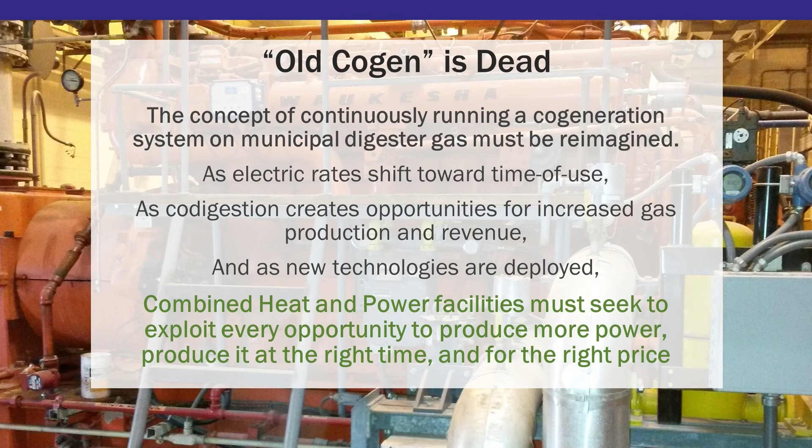And as new technologies are being deployed and coming to market, wastewater treatment plants with anaerobic digesters and combined heat and power facilities must seek to exploit every opportunity to produce more power, produce it at the right time and for the right price.

There are a few other drivers behind this. One is electric markets are changing again. And this is a statement specific to California, but we'll see this across the nation, which is that electric markets are deregulating. They're shifting toward customer choice. There are more renewables coming onto the market, and all of this is making for a very dynamic situation for the grid. And we'll talk more about that in the body of the presentation.

The last piece here is vehicle fuel. And there's the well-known saying, the best time to plant a tree was 20 years ago, the second best time is now. If you had put in a biogas to vehicle fuel system 5 years ago and had been running it these last 5 years, you'd be paid off and rich. So the second best time to have that facility would be right now, and specifically on-site vehicle fueling. And I'll show you the economics and the grant funding behind what's driving that statement as we get into it.

On the time of use front with electricity, I want to show what we call the duck curve in California. And the duck curve shows the amount of power required from other generation other than solar over a 24-hour period. So what you can see is the belly of that duck at 2020 is showing that traditional forms of power generation, whether that's nuclear or natural gas, we don't have coal here,

that drops off during the afternoon hours when solar is cranking. The problem is between 5 p.m. and say 9 p.m. when solar drops offline and there's a huge increased ramp up required of basically less renewable or non-renewable power generation sources. That's what's causing the emphasis on time of use, because the grid is less stable during that ramp up period. And our independent system operator here in California has to manage supply and demand very tightly over those hours.

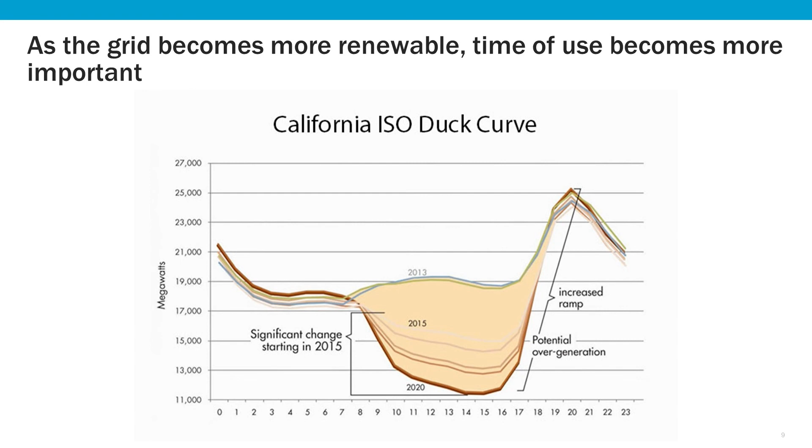That time of use dynamic is now reflected in the rate schedules that we're seeing in California, and that I think will spread across the country. The traditional peak power price, especially during summer, used to be noon to 6. That's when power rates were the highest, because that's when we had the highest power demand, running air conditioners, lights in offices, etc. Now, reflecting this grid instability as solar drops offline, the high price is now 5 to 8 p.m. or 6 to 9. It's later in the day.

It's a new dynamic, and the interesting part here is utilities that have solar and were counting on making money from 12 to 6 on peak power aren't going to make that anymore. Now the peak rates are when your solar is dropping offline. So you're less able to bank up the peak power credits with a solar power facility as you were 5 or 10 years ago. So an interesting shift there to keep in mind.

Vehicle fuel is driven by a major federal program. That's the Renewable Fuel Standard. And the credits you generate there are called RINs. There are different grades of RINs or categories based on, again, how your vehicle fuel was made. In California, we also have the Low Carbon Fuel Standard, and that's implemented by our Air Resources Board. And the goal there is to reduce the carbon intensity of our vehicle fuels in the state.

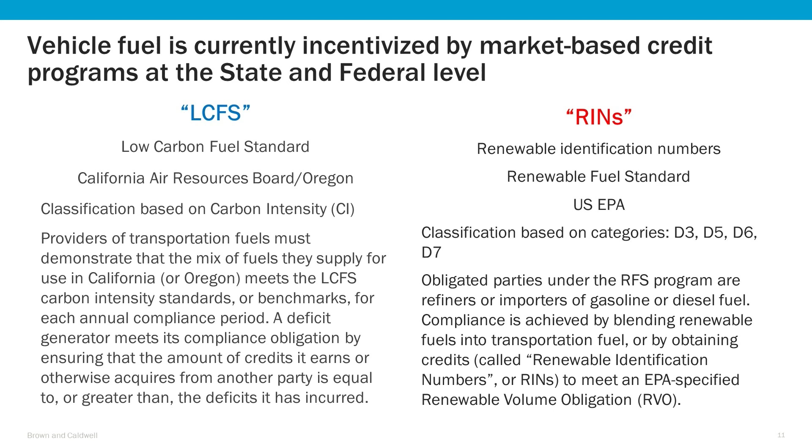You don't have to be in California to get LCFS credits. As long as you've got a pipeline connection into California, you can make biogas and inject it in Texas and still sell in California and derive these credits. But those are the two programs that are really pumping up vehicle fuel right now. Now, these RIN values are market driven based on supply and demand.

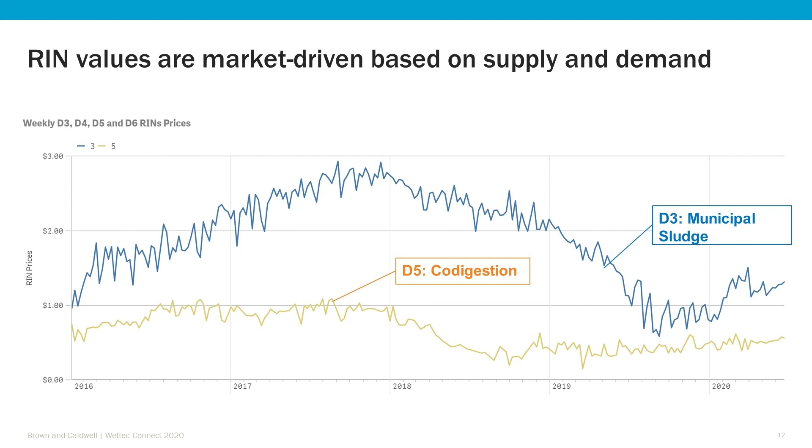Again, these are market driven. That's why you see the rise and fall of values. It's a supply and demand market. But this is what's incentivizing the vehicle fuel. And you've got to have a stomach for it. So, when agencies ask, what can we take to the bank? The answer is, 10 years from now, the crystal ball isn't super clear. We can model what it's worth right now and make some comparisons, and expect that they will come down over time, but it is ultimately up to the market and the regulators to decide.

If you inject into the pipeline, which is the next bar over, people ask, isn't that essentially natural gas? And the answer is yes. So what you get from pipeline injection is the commodity value of natural gas, which is about $3. Then you get the LCFS value, which converted into dollars per million BTU is about 7. And then that D3 RIN is 14.

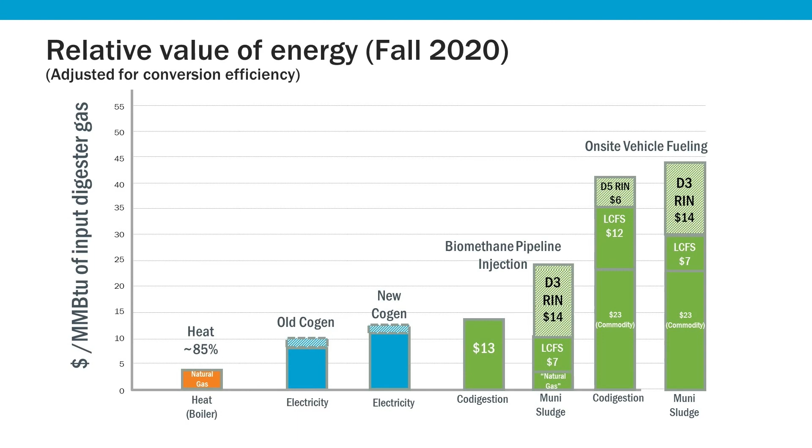So you can see that almost 80, maybe almost 90%, of the value you get from pipeline injection is based on environmental incentives, not the actual value of the energy content of the gas. And that factors heavily into a risk analysis if you're an agency looking at doing one of these projects.

The two bars on the right are on-site vehicle fueling. There, the value of the commodity is higher because you're offsetting the retail value of a vehicle fuel, such as diesel or gasoline. At the pump you're paying $2, $3 a gallon, so the commodity value we're showing for that gas is higher, assuming you're operating an on-site vehicle fueling facility and somebody's showing up and paying that $2 a gallon, which is a great value for your gas.

And then you're stacking the incentives on top of that. So going back to one of those bold statements, the best value you can get for digester gas or biogas is on-site vehicle fueling, and that's demonstrated by the bar on the right.

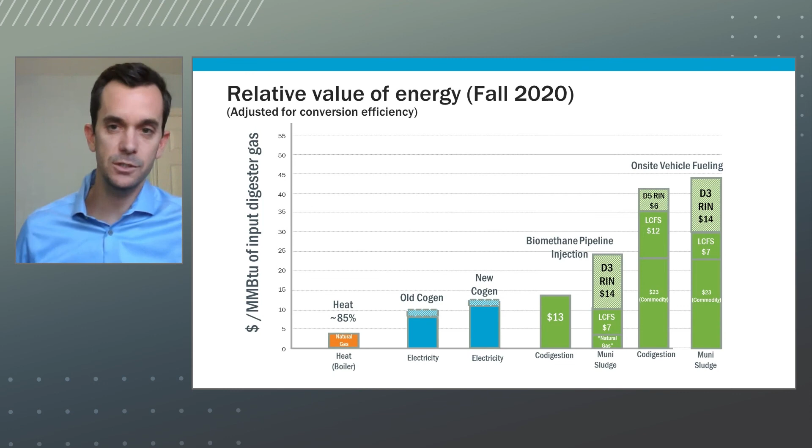All right, got some case studies here, and these are three different agencies that have looked at what to do with their biogas. The first one is the City of Santa Rosa, and I've coined this the continuous improvement example. Santa Rosa is in Northern California. They're a 15 MGD facility with 4 digesters.

Historically, they made about 200 SCFM, cubic feet per minute, of biogas. More recently, through high-strength waste co-digestion, they've increased their gas production by about double. Their old cogen system was 3 existing cogen engines that had actually been converted from engine-driven blowers into generators. They had natural gas blending with air dilution and no co-digestion, and that's a real familiar setup.

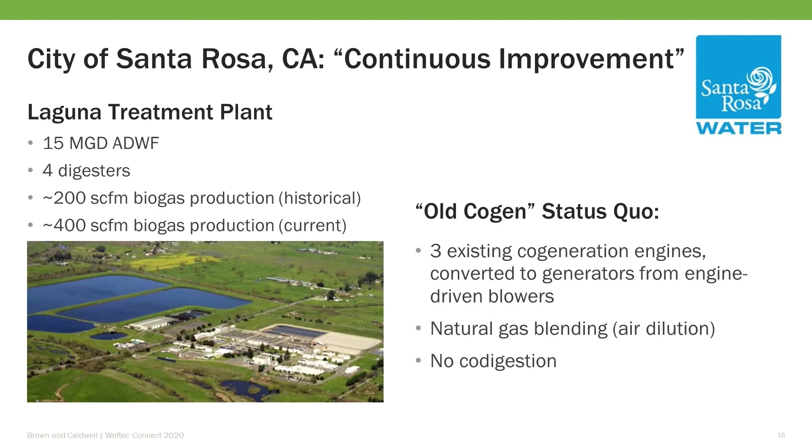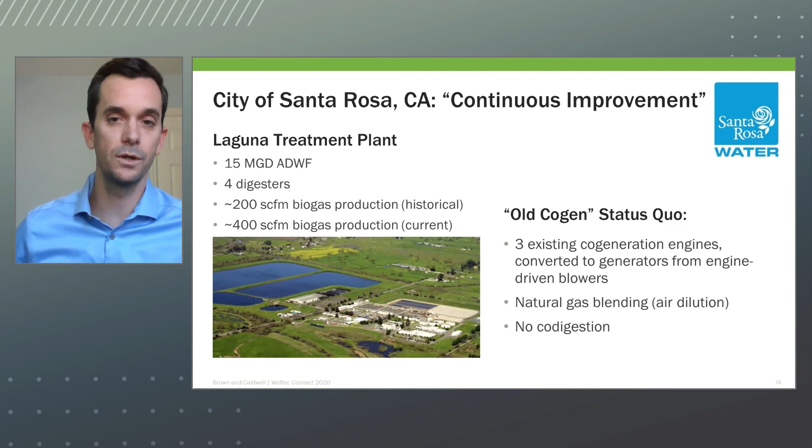There are a lot of treatment plants across the country that have basically old Waukesha engines that were a great system in the 80s and 90s, but are getting a little old. So we're going to show you on the next slide what Santa Rosa did to improve upon that situation.

Shown in the middle is their new cogen system. And when we go new on cogen, we call it combined heat and power, that's the new buzzword. So they put in 4, 1.1 megawatt cogen engines. These are highly efficient, lean burn engines. It's a great looking facility.

That project had enough gas to really operate one of them. The intent was to increase gas production through high-strength waste co-digestion, which is the picture shown on the top left. So that high-strength waste receiving facility came online, and sure enough we were able to double digester gas production there and operate 2 engines.

I almost glossed over the point here of the big check photo, which is a self-generation incentive program grant opportunity in California that we were able to successfully get for City of Santa Rosa and take $2.5 million off the sticker price.

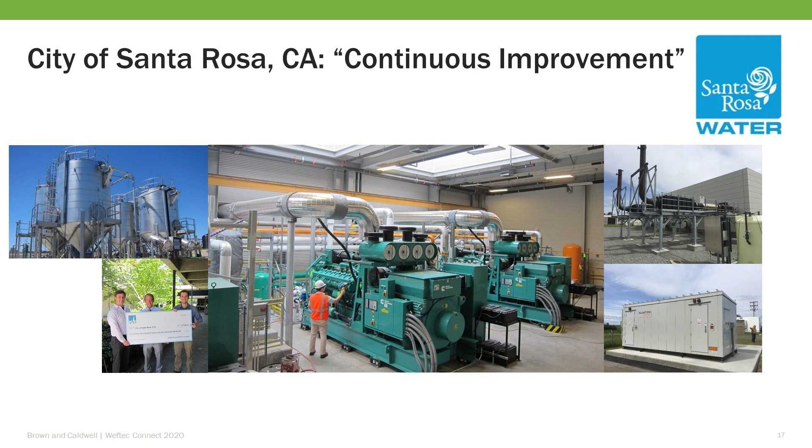With operating 2 engines and still having 2 for standby, City of Santa Rosa added selective catalytic reduction to 2 of the engines to allow them to operate on natural gas and meet current air emission standards. So they got more deployable power by running the extra engines on natural gas.

And then the picture below doesn't look super cool, but it is super cool. It's a microgrid system. So they have battery energy storage and can now play in the Cal ISO day-ahead market. They can do demand reduction, basically deploy power, store power, and they're much more adaptable for what's going on in the energy market, whether that's time of use, demand reduction, or day-ahead forecast elections. So really cool project: co-digestion, great engines, natural gas blending, battery energy storage.

Batteries, I'll just drill on that real quick. We're seeing the price of batteries come down. More and more agencies are putting in battery storage, whether coupled with cogen or solar. There are really a couple different levels you can play.

One is what I'm calling time of use gamesmanship. That's buy low, sell high. Store power when it's cheap, discharge your batteries when power is more valuable. Then there's time of use gamesmanship with solar and cogen—renewably charging your batteries with solar or cogen and then discharging it at a more valuable time.

Then there's demand response. That's using your batteries to respond to a call to action—hey, we need you to drop load—and then you employ your batteries to do that. And then there's what I call serious microgrid. That's getting in on the wholesale energy markets, doing more with the equipment you've got installed, and telling your system operator, hey, you'll pay me more for dropping 4 megawatts off the grid tomorrow afternoon. So those are the different levels you can play out with a battery.

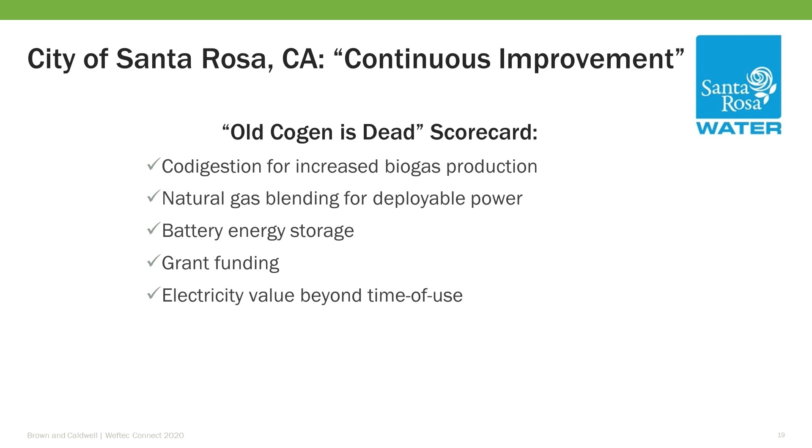So for each of these case studies, we've got a scorecard. I call it the old cogen is dead scorecard. You look at going from running old engines on digester gas, to what new cogen or combined heat and power is now: co-digestion, natural gas blending, battery energy storage, grant funding, and valuing electricity beyond just that moment that it's generated. So this is what we mean by old cogen is dead.

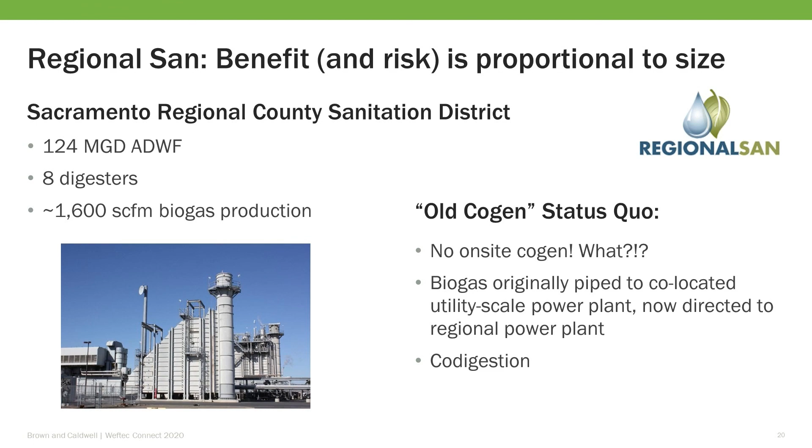Regional SAN is our next case study. The tagline here is that the benefit and risk is proportional to size. They're a much larger plant, over 100 MGD, 8 digesters, 1,600 cubic feet per minute of biogas production. They actually don't even have on-site cogen—they have a power plant, a utility scale power plant, co-located on their site, and that's where for the last almost 30 years all of their biogas has been directed.

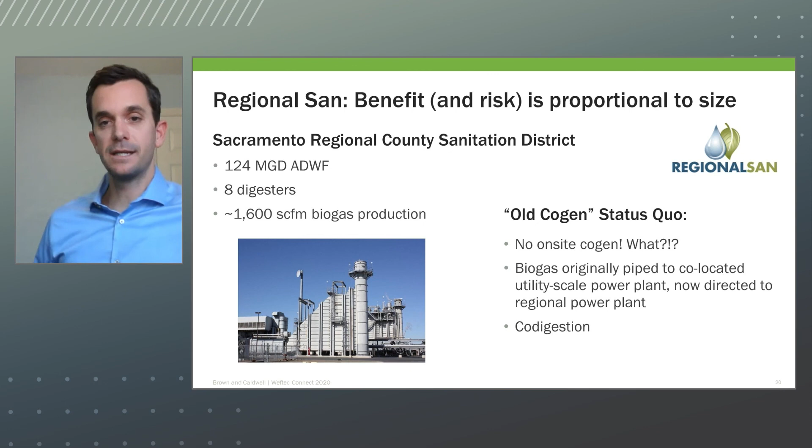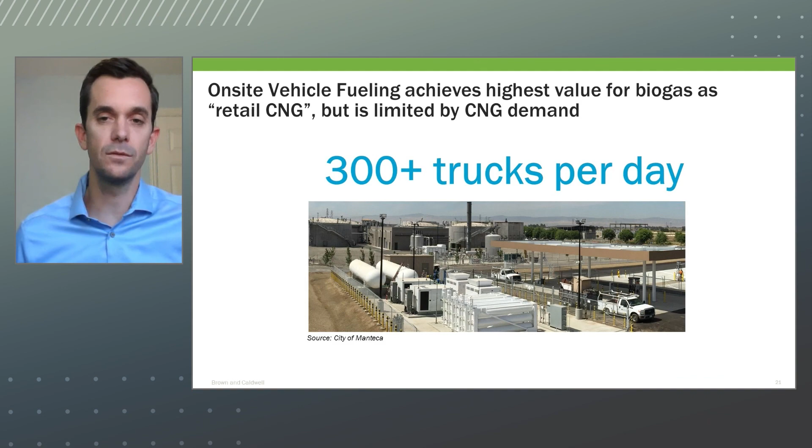With that agreement expiring in 2025, Regional SAN did a study to say, hey, what should we do now? The results are interesting. On-site vehicle fueling achieves the highest value for biogas, but when you're as big as Regional SAN, they make enough gas to fuel 300 or more trucks per day. The logistics of getting that many trucks onto their site and fueling them, coupled with finding a CNG vehicle fleet that large, just wasn't going to fit for the project size. So we ruled out on-site vehicle fueling.

In the worst case, what is that? That's no credits—by the time you get this built, RINs are shot, LCFS is shot. Is that realistic? No, those credits aren't going away, but they're not guaranteed. The best case is the current credits pumping for 20 years, and we know that's not realistic either. So the actual value might be somewhere in between, but we don't have any control. For an investment of this size, a $140 million spread is not an acceptable amount of risk for an agency like that. So pipeline injection is off the table.

The recommended project is engine-based combined heat and power. It's the best value for biogas and it reduces regulatory requirements, because when you use your biogas on site you get an on-site use exemption from OSHA regulations around process safety management and risk management plans. This is an interesting risk factor agencies need to think about with pipeline injection—OSHA has a 10,000 pound threshold. If you have more than that amount of gas on site and don't use it on site, you get entangled in all of these regulations. So if you are that big, there's a benefit to using it on site with cogen.

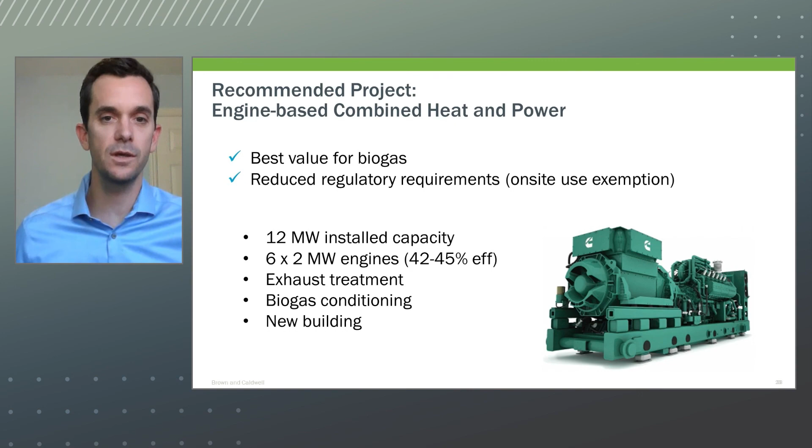So we're looking here at 12 megawatts of installed capacity, exhaust treatment and gas conditioning. We'll have state-of-the-art oxidation catalyst and selective catalytic reduction on that in a new building.

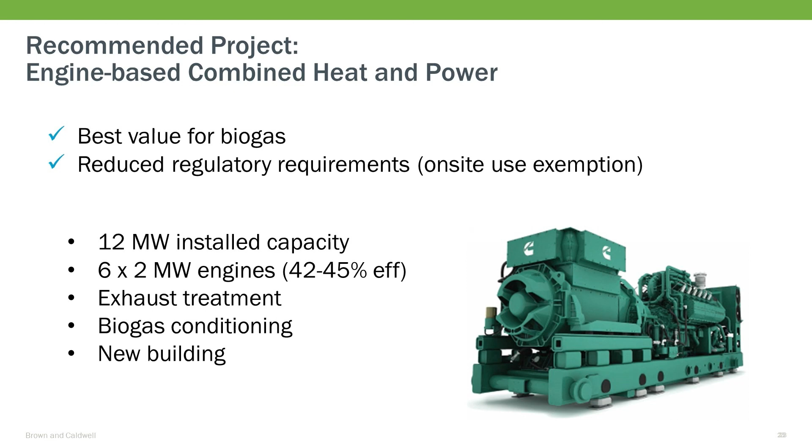We really had to get into power demand forecasting and time of use rate analysis. We needed to make sure that Regional San could use all of this power on site, which they can. They also have on-site solar, so we had to look at time of use there.

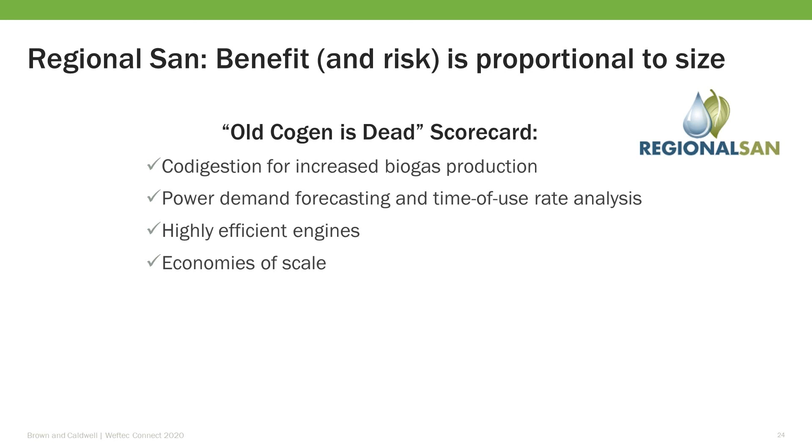We're doing highly efficient engines, and the real takeaway here is economies of scale. With a 12 megawatt system, your cost per unit output is a lot lower than if you're doing a 500 kilowatt cogen system. So this project makes a lot of sense.

The last one is Fairfield-Suisun, and the tagline here is vehicle fuel is king if you have a buyer. So they're back to the size of about Santa Rosa, 200 SCFM of biogas. I'm calling this the not so old Cogen status quo.

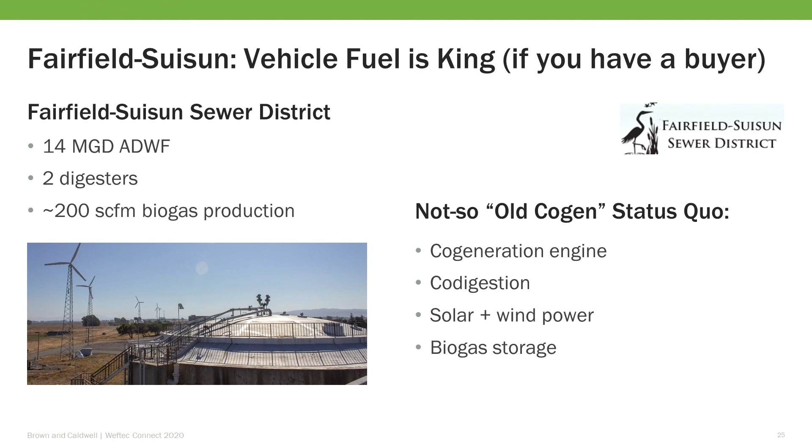Fairfield-Suisun is already doing everything right, so the challenge here is figuring out a way to do it even better. They have a Cogen engine, they already do co-digestion, they have solar and wind, and they have gas storage. So the real challenge here for us was to see if we could do even better.

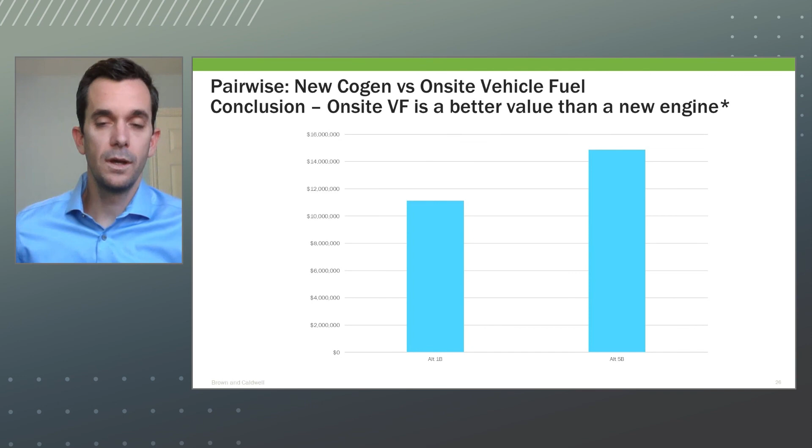Ultimately, there were two alternatives in our analysis that rose to the top. New Cogen, the net present value is shown on the left, and on-site vehicle fuel, net present value shown on the right. So on-site vehicle fueling is edging out Cogen based on the assumptions that we showed earlier.

You're selling it on site to a vehicle fueling partner with a CNG fleet. They're paying you around $2, $2.50 a gallon for CNG, and you're racking up the credits. In that scenario, on-site vehicle fueling looks really good.

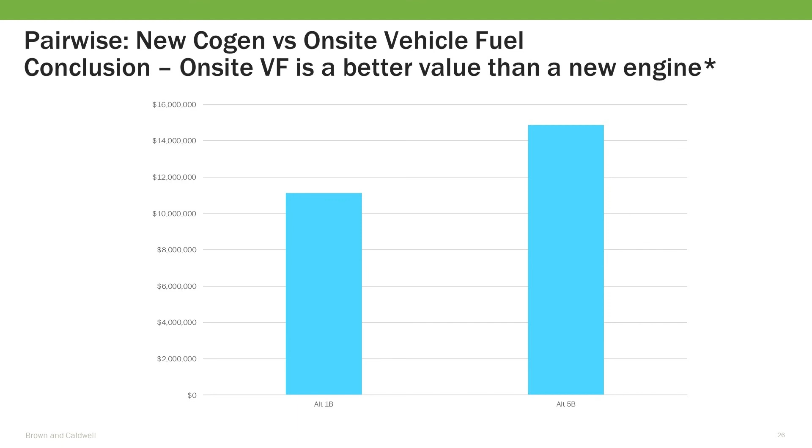The other cool point is this is the net present value compared to status quo. So both of them have a benefit over the already good existing condition, which shows you that there is ground to be made putting in more efficient engines, even if you stick with Cogen.

So our ultimate biogas utilization master plan recommendations for Fairfield-Suisun are to further increase biogas production via co-digestion, outreach to local industries, and find more organic feedstocks. Pursue a vehicle fuel partnership for on-site vehicle fueling.

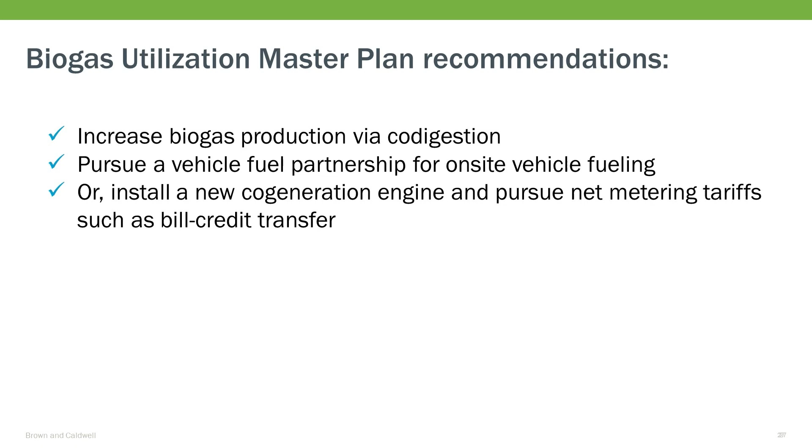What does that mean? The first person you call is the solid waste hauler in your city or in your community. If you're the city of Roseville, for example, and you operate the wastewater treatment and the solid waste collection franchise, that's an easy partnership.

If you're Fairfield and you're a special district that overlaps different cities, it's a little trickier, but you figure out who's got the solid waste contract, you talk to those companies, and you see if there's a potential alignment there. If that partnership doesn't work out, Fairfield still has a great project.

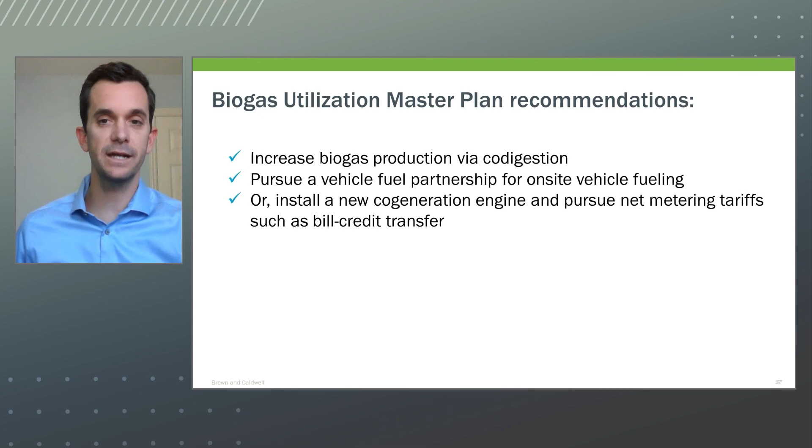They can put in a new Cogen engine and pursue net metering tariffs and bill credit transfer to maximize the value of that time of use electricity.

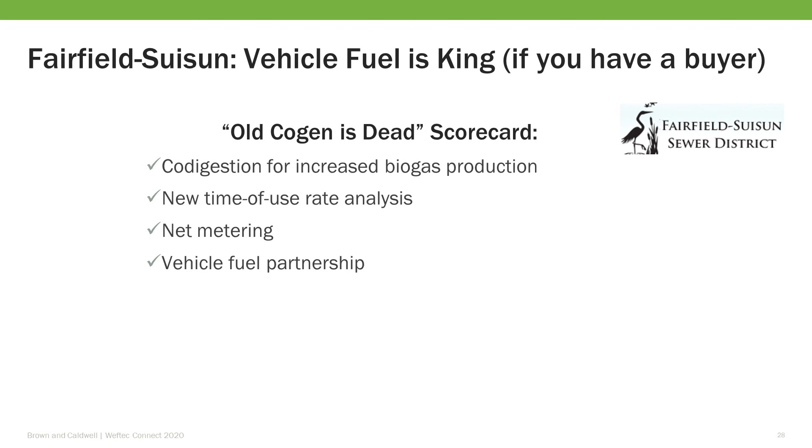Their scorecard: increase gas production, really leverage time of use rate analysis, leverage net metering and the opportunities that are there for, in Fairfield's case, the ability to wheel their power from their wastewater treatment plant to their pump stations, and potentially a vehicle fuel partnership.

In conclusion, in every case, the agencies that we worked with were able to find a better value for their biogas. And that reinforces that old Cogen is dead - that concept of just running an engine, set it and forget it, doesn't maximize the value for your biogas. There are ways to pursue co-digestion, energy storage,

different outlets for biogas, such as vehicle fueling, to really maximize the value to the wastewater treatment plant and to the ratepayers, which is cool. If all of this sounded super complicated and fancy and you're just flaring your gas, don't worry about it. Do something.

We call the flare the flame of shame, and it's much better to do anything rather than just sit on the sidelines and wait. So that's, I think, the call to action based on what's going on in the world.

I'm in California, where the sky is filled with smoke thanks to a heat wave and climate change. I think there is a real obligation for wastewater treatment agencies to make the most of their biogas. It's a renewable fuel, it's an asset. It'll benefit the ratepayers, and it'll benefit the environment.